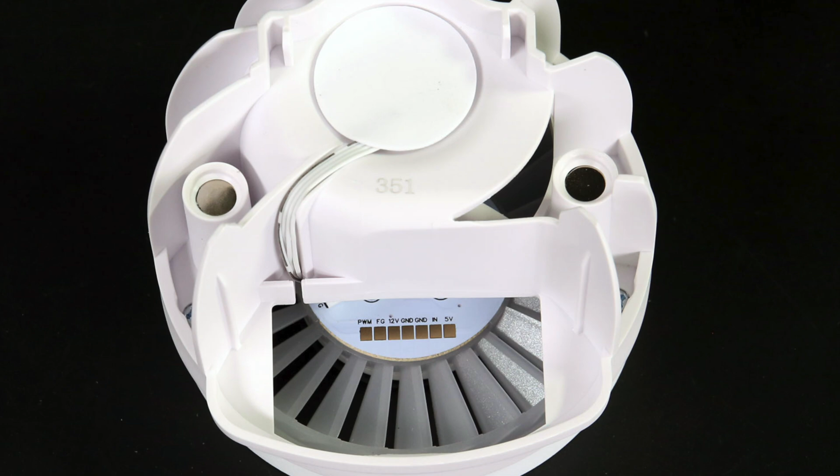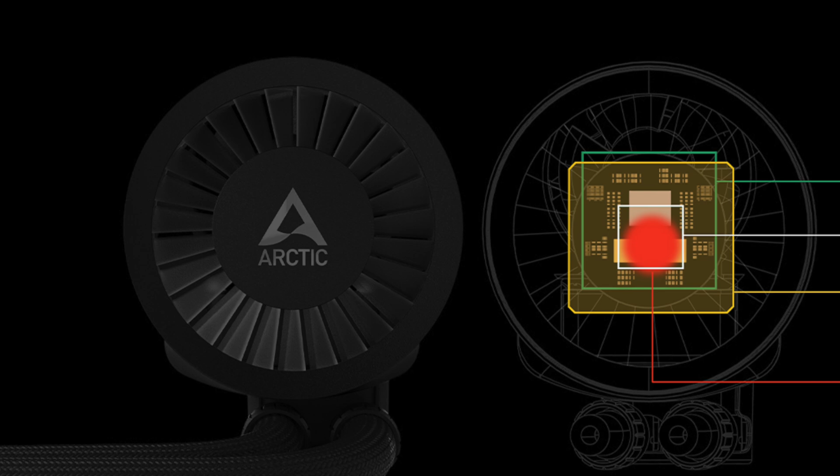Arctic offers an LGA 1700 contact frame in the cooler's bundle to replace the stock one. The stock one locks the CPU to the socket at 2 points, leading to possible uneven pressure points that affect the contact surface with the cooler's block. Arctic states that thanks to the provided mounting frame for LGA 1700 sockets, the CPU is evenly locked to the socket, ensuring better contact with the cooler's block.

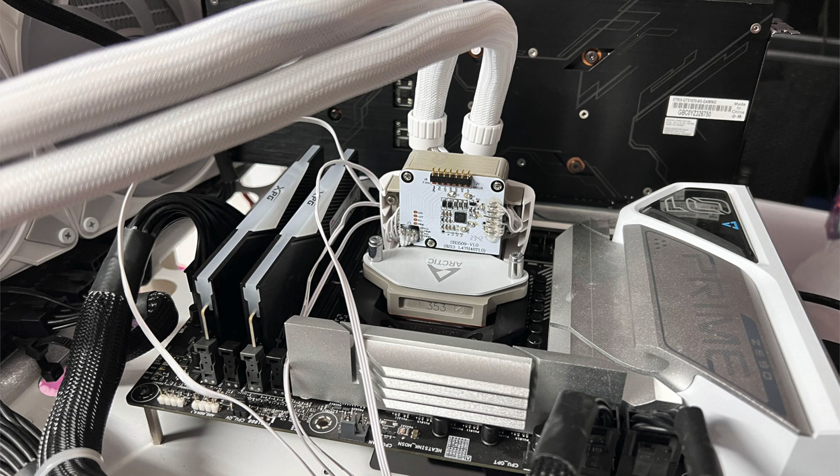The EU prices include VAT. The box is unusually shaped to accommodate the cooler's large radiator. On each face there is a scheme of the cooler along with its model number and some more data regarding the provided guarantee and socket compatibility.

Around the back you will find more details on the product's technical specifications. There are also two QR codes on this side, one leading to the online manual and the second to the support and feedback link. The bundle includes the necessary mounting hardware, a small thermal paste tube of Arctic MX6, and a T20 driver.

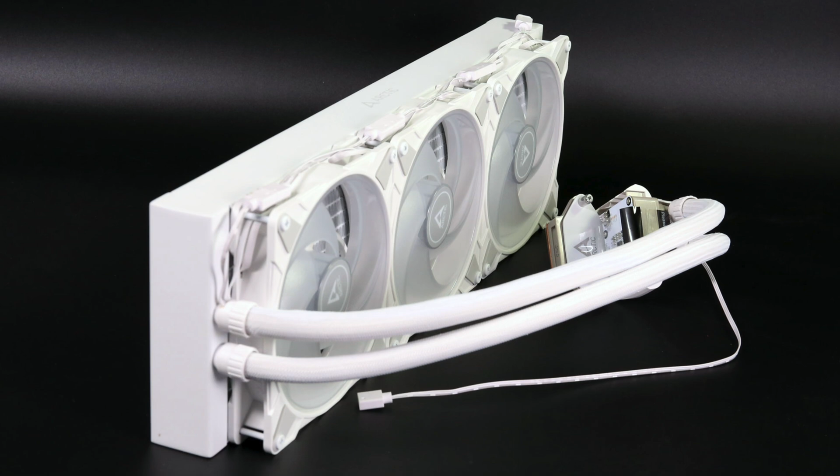The all-in-one comes with the fans pre-installed and with all of their cabling in place, saving you some time during the installation process, which also becomes easier.

Typically, the block hosts the cooling pump and has all the necessary circuits to power the VRM fan and its RGB lighting, which is secured in place magnetically. The tubes leaving the pump can be easily adjusted in angle to meet your system's requirements.

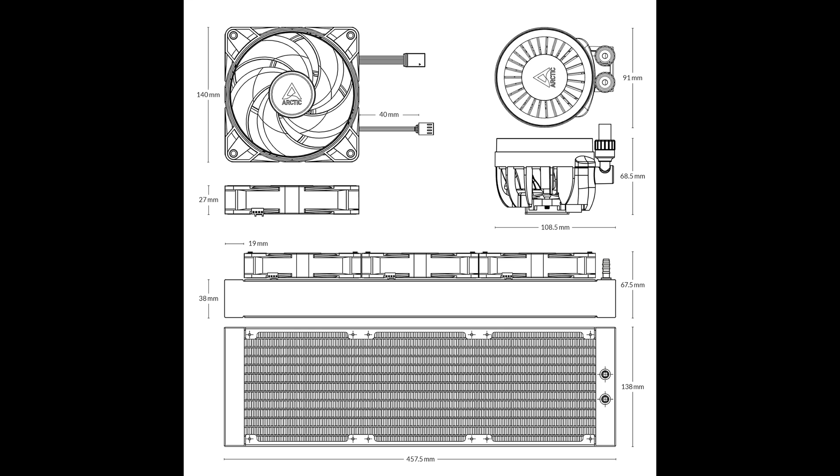The block's base is relatively small and made of copper for better heat transfer. This is why AMD's Threadripper CPUs are not supported.

The radiator is thicker than usual with a depth of 38mm, but it is not so dense, hence it doesn't require high static pressure fans for optimal performance.

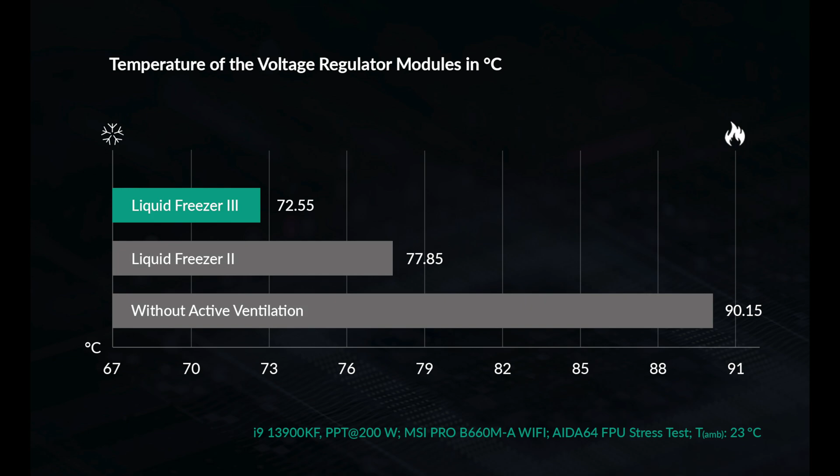The fans can spin up to 1900 RPM with 70 CFM and 2mm aqua static pressure. These are the official values. I might remove them at some point and check on the Longwin machine to see if these values stand.

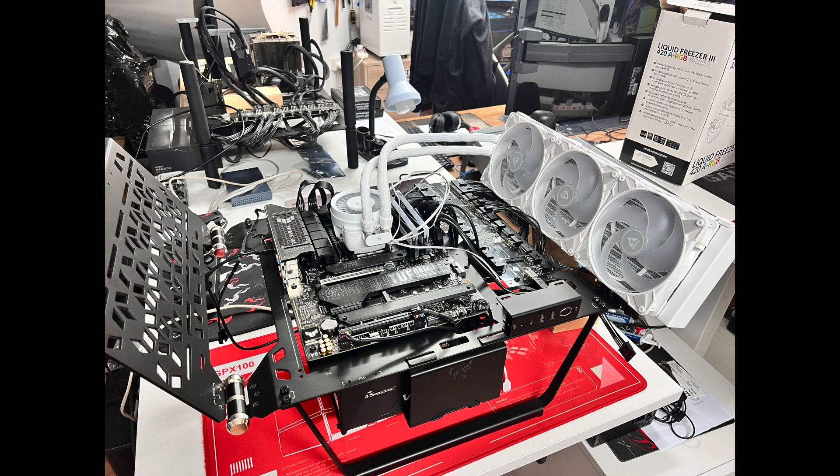The VRM fan is large, so I expect it to offer good cooling around the CPU socket area. Its speed is PWM controlled, varying from 400 to 2500 RPM. This is an extensive range.

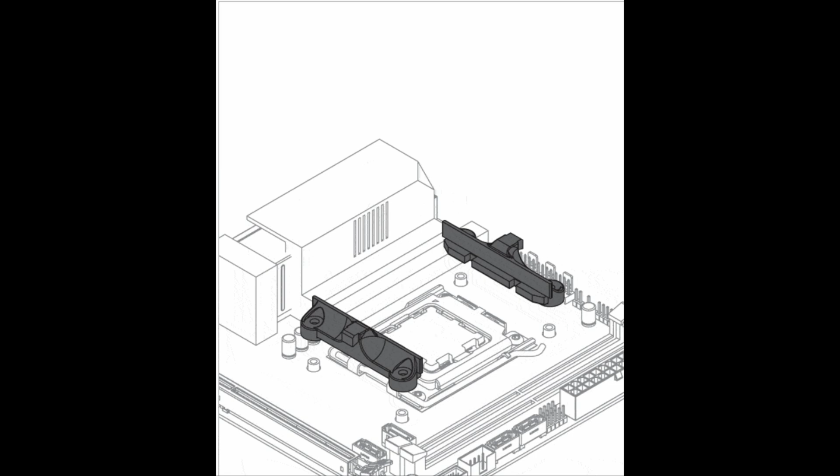Installation. To avoid all cable mess, you can use the all-in-one PWM cable, which takes care of the pump, the VRM fan, and the radiator fans. If you want to control everything separately, connect the respective connectors to mainboard headers or use a dedicated PWM controller like the Corsair Commander Core XT.

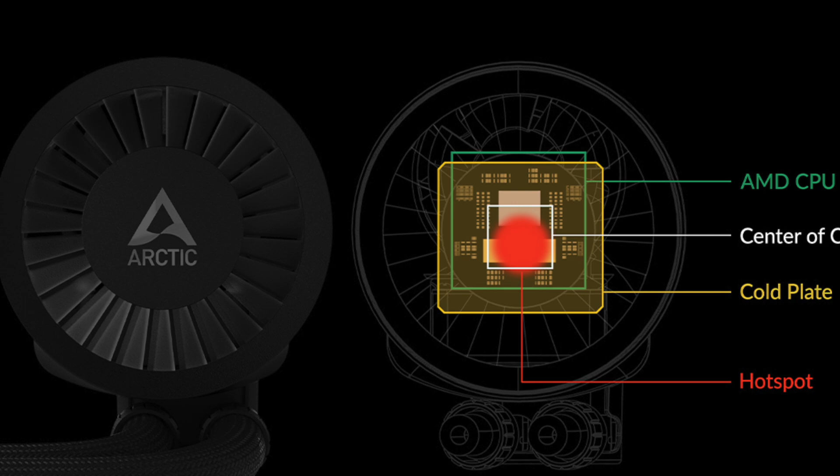You must remove the stock brackets and install the bundled ones for the AMD sockets. The brackets are labeled L for left and R for right. Since the hotspot in newer generation AMD processors is not in the dead center, the AMD mounting brackets have a 5mm offset to achieve better performance.

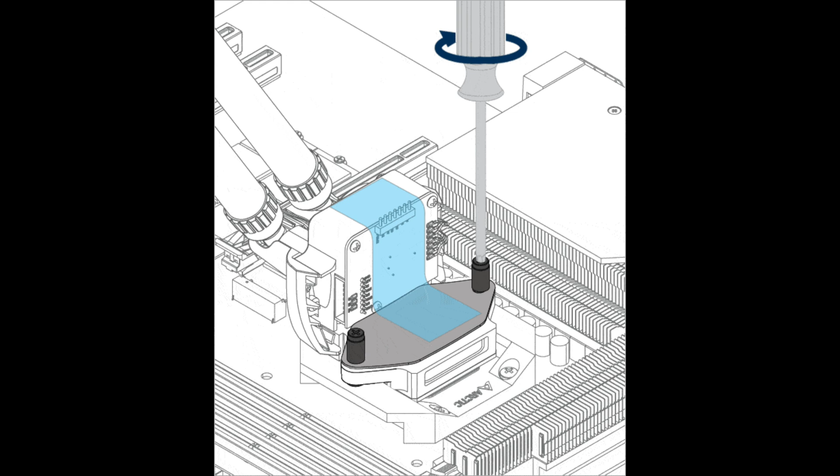For Intel sockets, removing the mainboard from the chassis is better to have an easier time, since you have to remove the stock Intel Independent Loading Mechanism (ILM). Arctic provides instructions on how to replace the stock ILM mechanism. It is not as straightforward as the AMD procedure, but the provided contact frame promises to do a better job than the stock one.

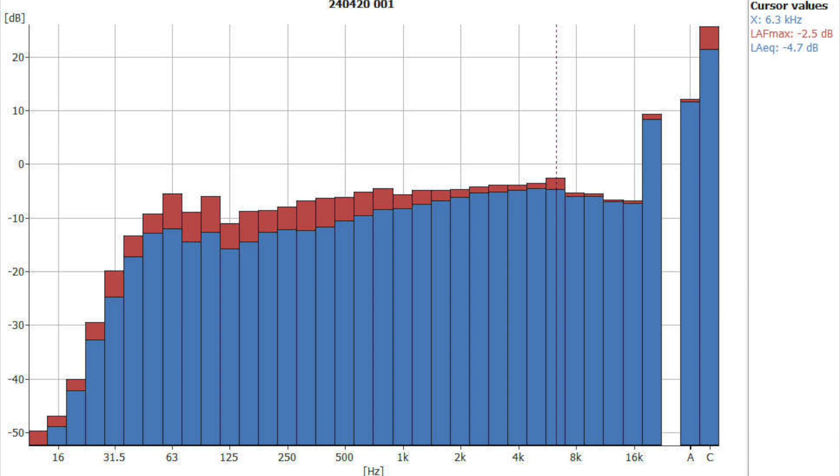Frequency plots at 10% fan speed. The peak frequency is at 20 kHz. I also noticed increased noise at this frequency in the Freezer 3 280. At 20% fan speed, peak frequency is also 20 kHz.

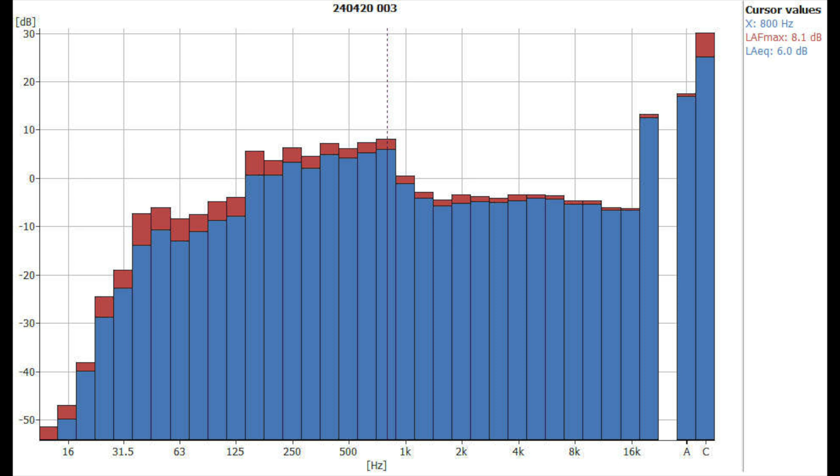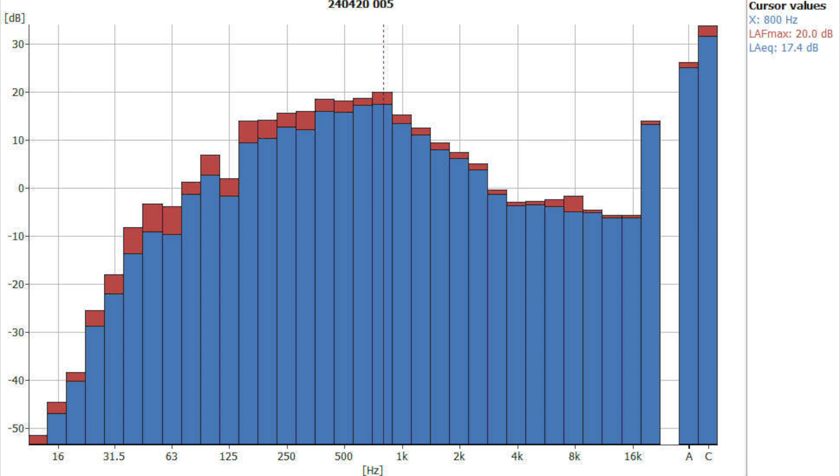At 30% fan speed, peak frequency is 20 kHz with a range of 160 to 800 Hz. At 40% fan speed, peak frequency is also 20 kHz with the same 160 to 800 Hz range. At 50% fan speed, the peak frequency range extends to 160 to 1250 Hz.

At 60% fan speed, the peak frequency range is 160 to 2500 Hz. At 70% fan speed, the peak frequency range is 250 to 2500 Hz. At 80% fan speed, the peak frequency range remains 250 to 2500 Hz.

At 90% fan speed, the peak frequency range is 250 to 2250 Hz. At 100% fan speed, the peak frequency range is 250 to 2250 Hz.

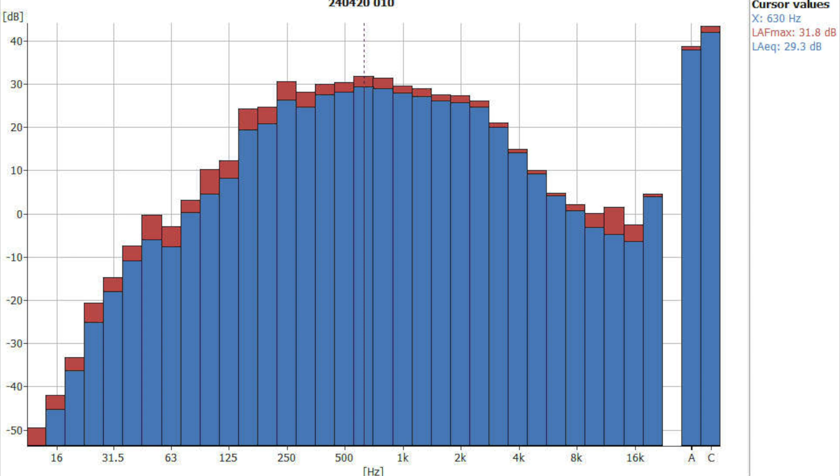For the signal recordings, I have recorded all signals, but I have enabled automatic gain control to make it easier for you to reproduce them.

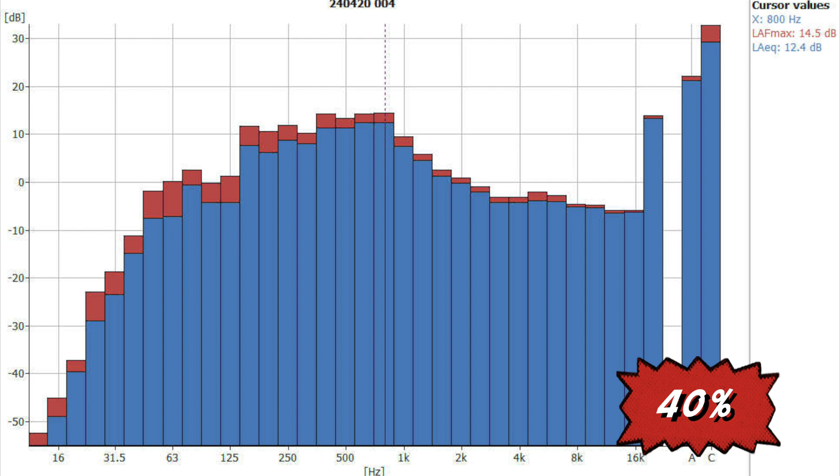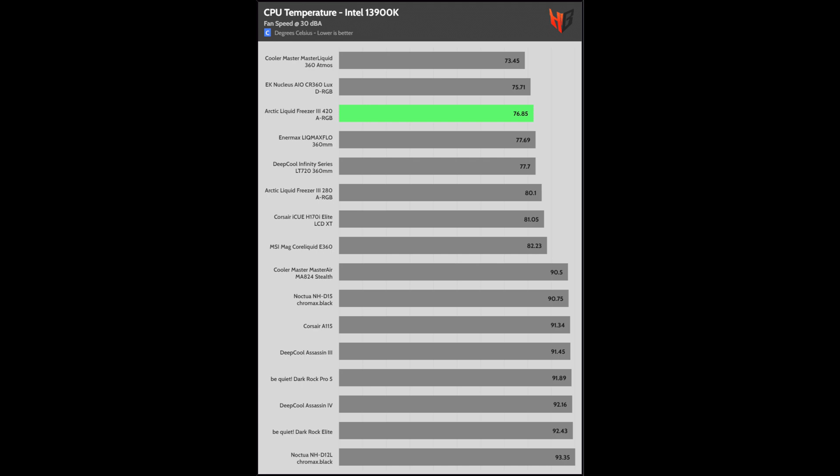Normalized noise tests, Intel first. CPU temperatures are low, but it cannot beat the Cooler Master Atmos 360. CPU frequencies are pretty high. As for CPU wattage, the Liquid Freezer 3 420 allowed for the highest power consumption because of its better lock mechanism.

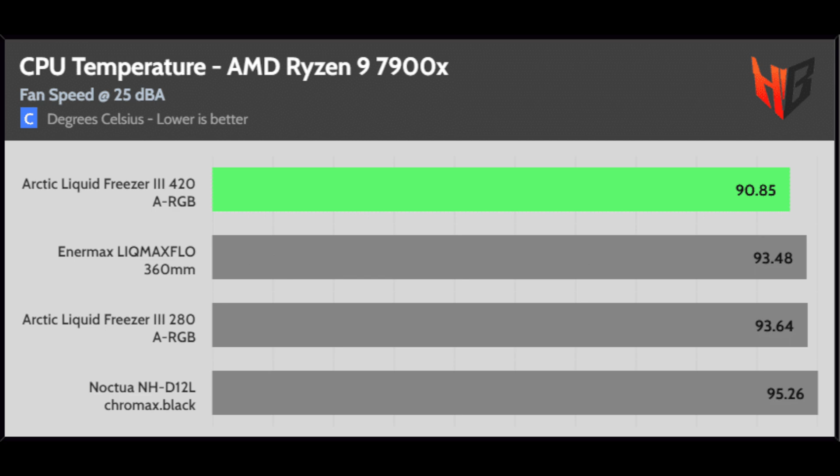AMD results. CPU temperature: the Arctic cooler achieves the lowest temperatures on the AMD platform. CPU frequency: as expected, the large Arctic cooler allows for the highest CPU clocks. CPU wattage is also highest with the Arctic cooler.

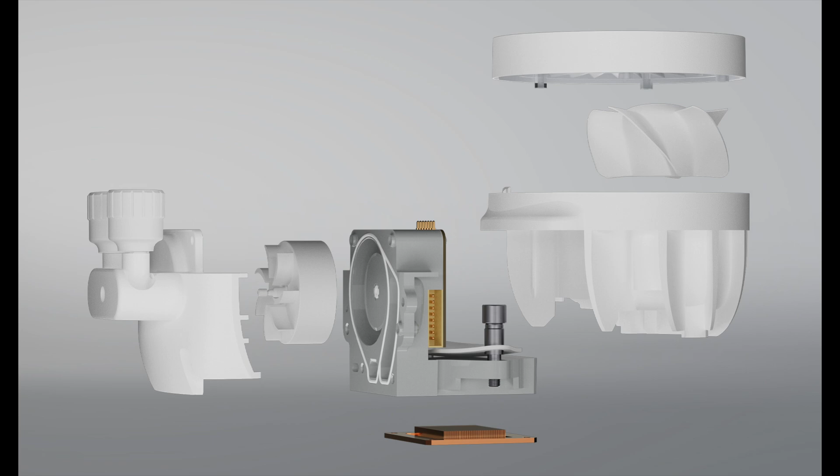There are some assets that this all-in-one has, which I can mention again here. For starters, it has a fan to cool down the mainboard's VRMs, which can get pretty hot given that Intel's high-end CPUs can draw more than 360 Watt if you dial the PL1 and PL2 BIOS settings high enough. Ignore what the mainboard sensors say - I measure CPU power consumption directly from the respective PSU connectors to get the complete picture.

Besides the VRM fan, another strong point of this all-in-one is that it provides an LGA 1700 contact frame in the cooler's bundle to replace the stock one, offering better contact with the CPU. The non-stock contact frame does a way better job than the stock one, and this is also shown by the CPU power consumption, which is notably higher in the Liquid Freezer 3 models compared to other coolers I have evaluated so far. The better contact unlocks the CPU's potential, so it asks for more power.

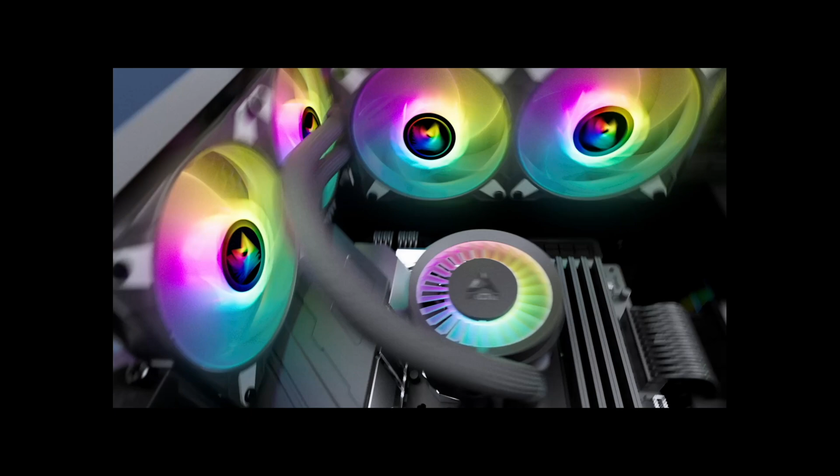The only problem here is that the cooler's installation in Intel systems is not as straightforward, and it will be easier if you remove the mainboard from the system, which is what Arctic suggests. I should emphasize that this cooler doesn't support other Intel sockets but the LGA 1700 one, so it won't be compatible if you use an older Intel system.

Speaking of installation, the fact that the all-in-one comes with the fans pre-installed and all of their cables in place will significantly relieve many users, especially the less experienced ones. Moreover, you can use the all-in-one connector to control everything through a single header.

I wouldn't advise that though, because it is better to have the VRM fan controlled separately since it has a small diameter and can spin at high speeds, hence it can be annoying if its speed is paired with notably slower radiator fans. The ARGB lighting is the cherry on top, especially for users with systems that expose their internals.